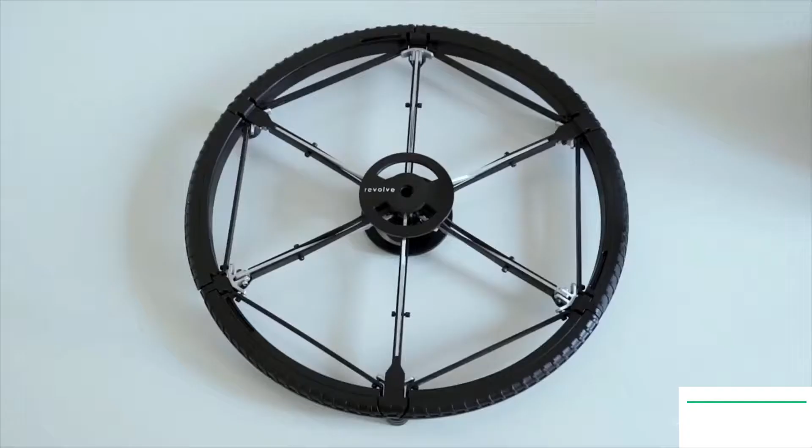With Revolve, you will be able to travel everywhere and easily carry the wheel between trains, airplanes and cars. With a simple action, you can open and close the wheel.

Its unique hexagon structure allows for a solid and iconic design in both open and closed configurations. The airless tire allows a unique compactness and modularity.

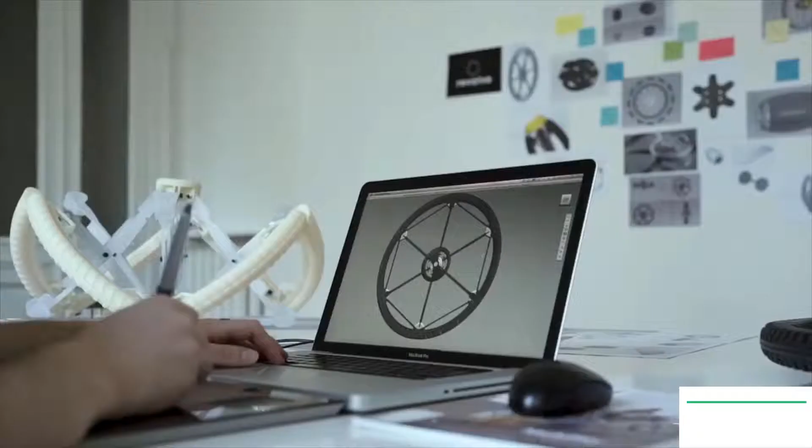This patented mechanism was reached after years of work, several hundred 3D models and dozens of physical prototypes, in order to get the most efficient and accurate folding mechanism.

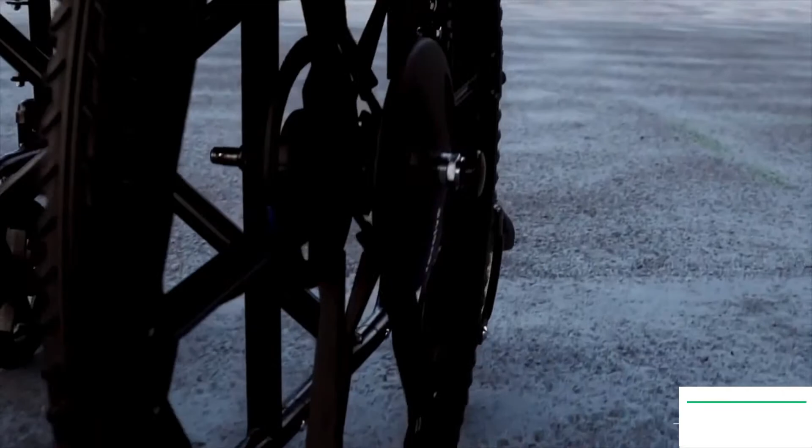The wheelchair can benefit from a large wheel, easy to store everywhere at any time. Compact and solid, Revolve allows the user to safely use the wheelchair in every condition with a modularity never seen before. Initially designed for bicycles and wheelchairs, Revolve has the flexibility to be integrated into future foldable vehicles.

Revolve, the wheel in a new form.

We are a new breed of automaker, and we want to challenge the idea of what a car can be. We started with a few simple goals: to empower short trips, to have a design that makes sense for modern cities, to have a minimal impact on the environment, and most importantly, to be affordable by everyone.

While I was studying architecture in New York, I realized the biggest disruption to urban design was the elevator. By empowering vertical movement, the elevator transformed cities. That's when I realized a simple vehicle has the power to reshape our communities. I'm proud to say we have accomplished that and so much more.

We reinvented the NEV category and created the most compact, intuitive, and energy-efficient vehicle. We like to think of Eli Zero as the iPad if conventional cars were laptops. It provides a radically simplified and superior experience for local trips, and the best part is Eli Zero only costs a third of a normal car.

Manufacturing runs in my family's blood, from lawnmowers to golf carts, so I know it's a rare opportunity to be able to create something that can have a profound impact on people's everyday life. Whether you're going to the gym, grabbing some food, or going to the market, Eli Zero makes it easy to get from A to B.

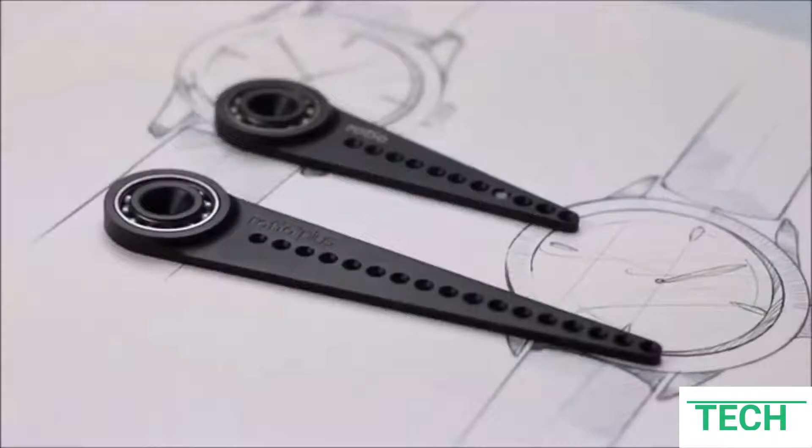Design starts with a fluid process of laying down the first lines, seeing your ideas and concepts take shape before you. It's imperative to capture the essence of your idea and to be able to communicate it clearly and quickly. Tools that aid this process, that allow you to focus on your work, are a requirement, not a luxury.

Rotio has created a new tool that is an extension of the creative process. The interaction is refined and novel. Your eye follows the rotation and the way the line is formed, immersing you in your work.

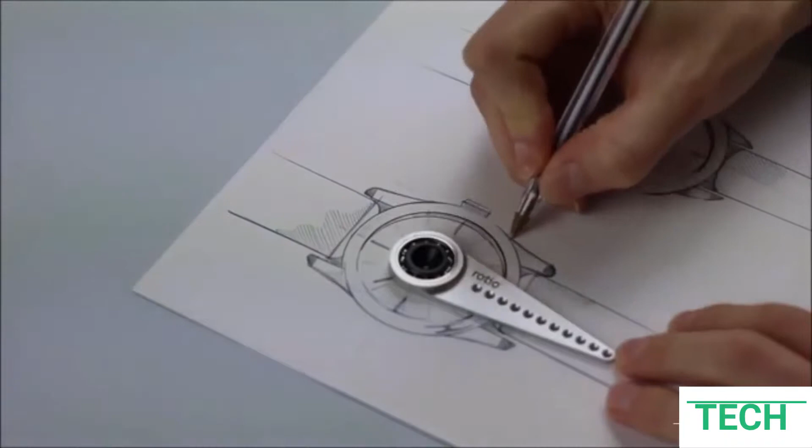A great outcome is the result of a great process. Rotio and Rotio Plus seamlessly integrate into any designer's workflow.

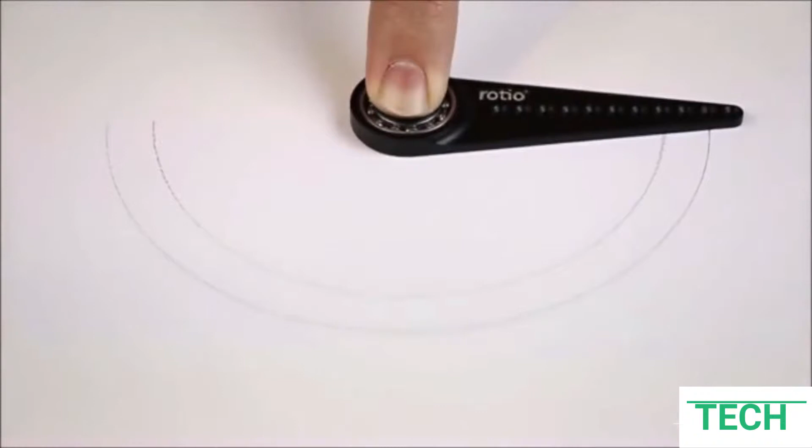Don't you know that plastic straws are bad for the environment? What is this? Ugh. If you're gonna suck, suck on this. This is Final Straw, the world's first collapsible, reusable, totally badass straw.

Straws are supposed to be convenient, right? So we decided to do something about it. This is Final Straw.

Final Straw folds up to the size of a car key and fits in this sexy case. Final Straw is small enough to fit in your purse or pocket. But if you don't have pockets, you can just... Uh-oh, where'd it go?

If you can remember your keys when you leave the house, you'll remember your straw. It fits on your keychain, so there's no way you're gonna leave it in your car.

And there's no need to worry about keeping it clean. Included with each straw is a specially designed squeegee. Simply pull it through the straw to make sure it's squeaky clean.

Final Straw is BPA-free, dishwasher safe, and with our patented design, the ends are soft, so it's safe for human children and their adults. There you go, little buddy.

This straw may seem small, but because of its size, it's actually very harmful to the environment. Straws can't be recycled, so they're often left here in the ocean, where they hurt and kill my friends in the sea. There you go. Go be free.